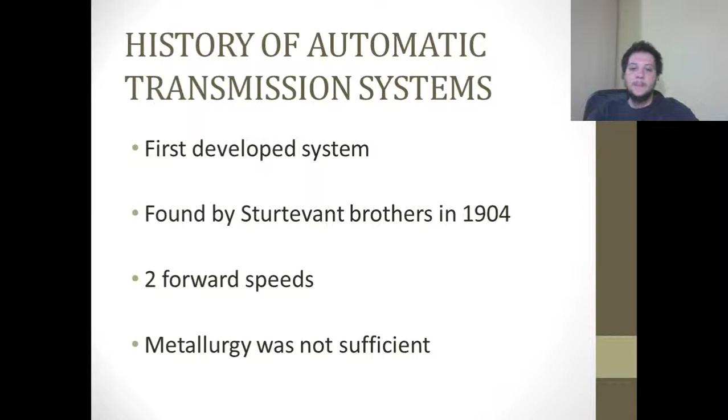The main idea behind automatic transmission systems is to make driving cars easier by removing the clutch. Now I'll show a video about this.

Did you ever realize how many motions it takes to drive a car with a conventional transmission? Watch closely. She's ready to start on her drive. With one hand, she steers. The other manipulates the gear shifter. One foot operates the clutch, the other feeds the gas, and there you are. After 19 distinct manual operations, she's finally underway. Not so with Oldsmobile's Hydra-Matic Drive. There's no clutch pedal to push, and the usual gear shifter is replaced by this simple direction selector. Just set the selector at drive, then step on the accelerator, and you're off. All shifting is automatic. Oldsmobile's Hydra-Matic is simplicity itself.

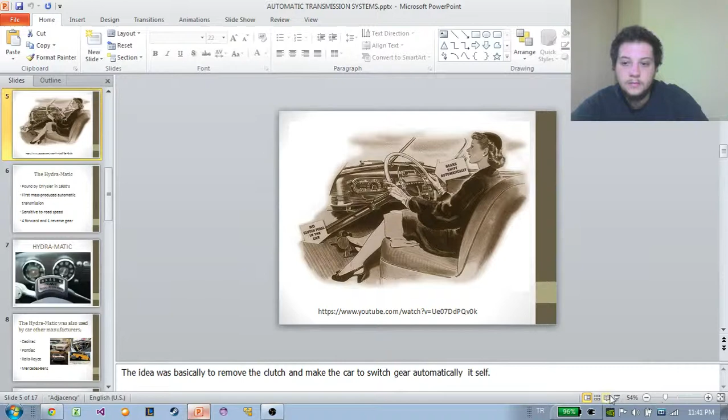This video you just saw was actually the commercial of the Hydra-Matic system, which was the first mass-produced automatic transmission system. It was founded by Chrysler in the 1930s, and it was sensitive to road speed. It had 4 forward shifts and 1 reverse shift.

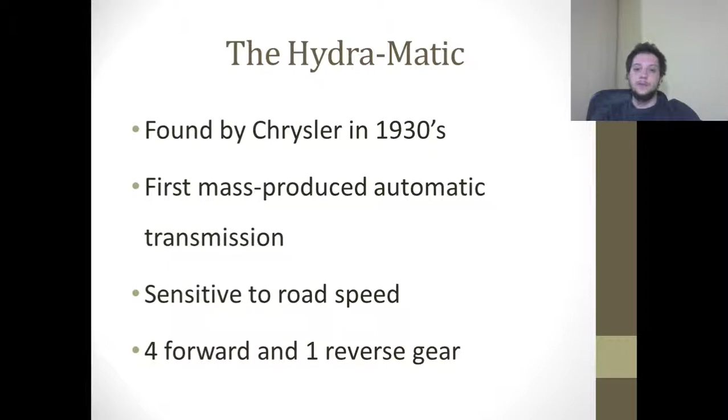The Hydra-Matic was also used by car manufacturers like Cadillac, Pontiac, Rolls-Royce, and Mercedes-Benz. It was also used in World War II in some military vehicles. All other systems were developed based on Hydra-Matic through the years. Hydra-Matic was a fluid coupling system, and the shift quality was always a problem.

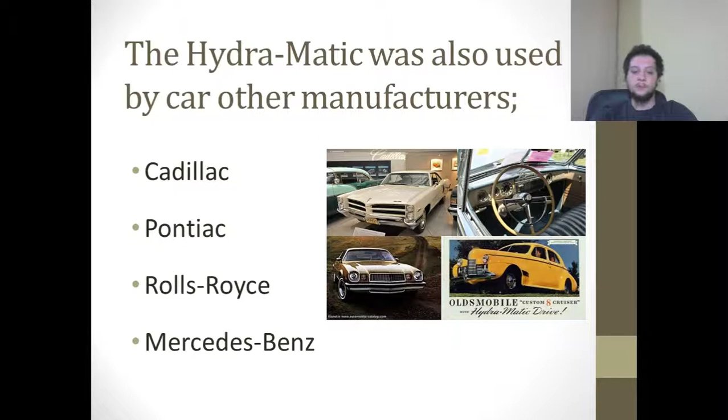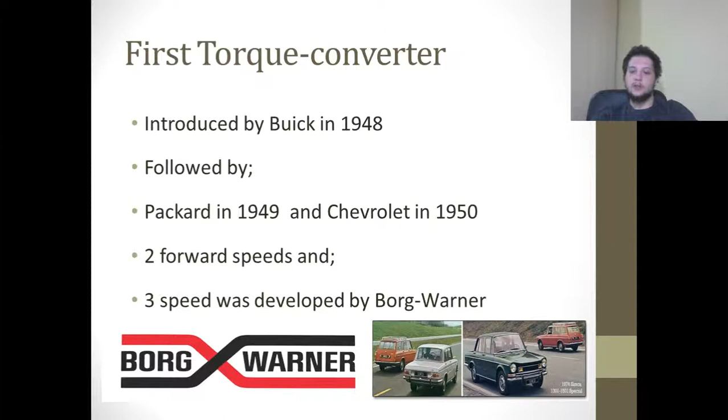Then, after Hydra-Matic systems, the first torque converter system was introduced. It was introduced by Buick in 1948. It was followed by Packard in 1949 and Chevrolet in 1950. At first it had 2 forward speeds, and then a 3-speed was developed by Borg-Warner, and Borg-Warner sold it to American Motors and Ford Motor Company.

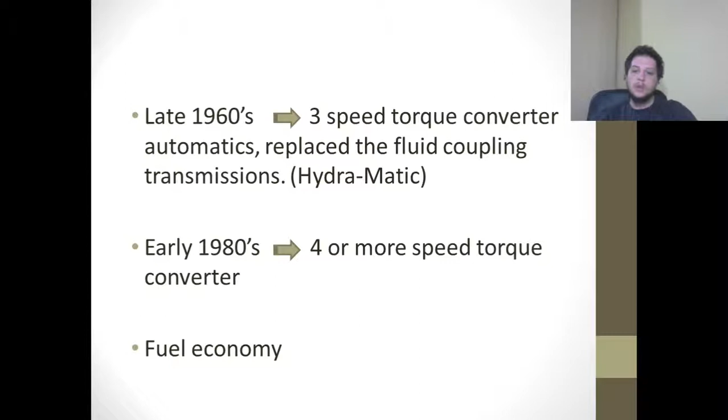By the late 60s, 3-speed torque converter automatics had replaced the fluid coupling transmissions. By the early 80s, 4 or more speed torque converter automatics were introduced, and these improved automatics were providing fuel economy.

The TCU shared the information with the ECU, and they made arrangements of the shifts, when to change and how to change. Engineers believe that this way there is more control on shift point, shift quality, and shift speed.

And with these systems, they developed the DSG system, direct shift gearbox. It was the world's first dual clutch transmission system, and it was designed by Borg-Warner and licensed to Volkswagen. Now I'll show you a video about the direct shift gearbox.

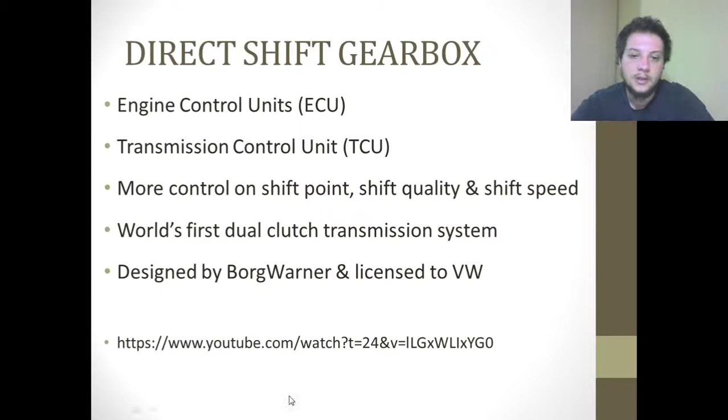DSG, the sporty and efficient automatic transmission. The DSG combines the agility of a manual gearbox with the convenience of an automatic. Shift times in the order of milliseconds mean maximum driving pleasure.

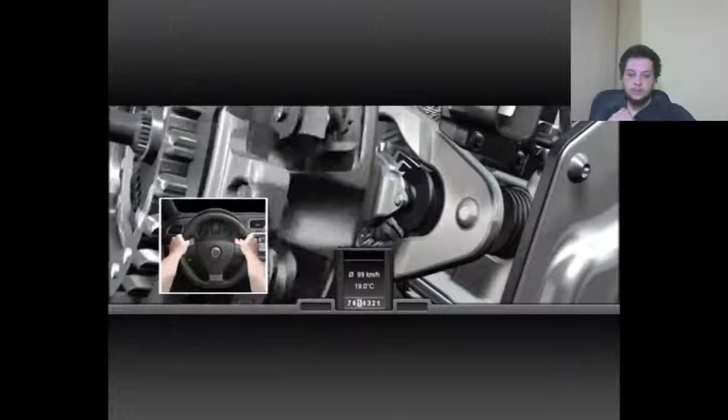The DSG gearbox accelerates without interrupting the flow of power. That means maximum comfort and outstanding acceleration. In automatic mode, the DSG always selects the right gear, and that ensures optimum fuel consumption. DSG, the most efficient automatic.

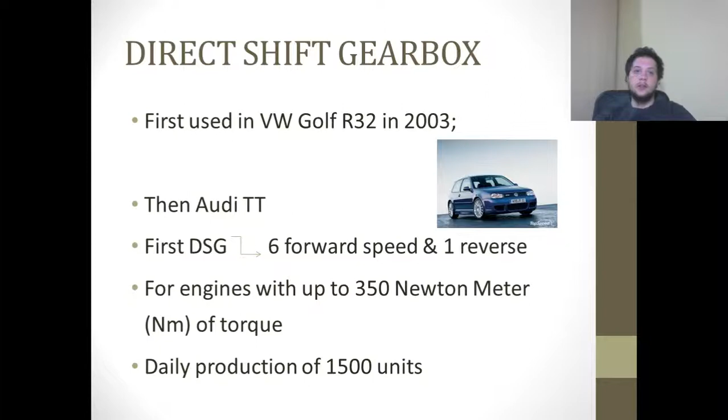Here is a video about DSG. DSG was first used in the Volkswagen Golf R32 in 2003. It had 6 forward speeds and 1 reverse speed. And it was for engines up to 350 Newton meters of torque. Otherwise, it would fail. And it had a daily production of 1,500 units. Here you see the DSG controllers.

You see the P sign. It means park. It must be used when the car is stable, not when it is moving. It engages the parking lock. It doesn't move if you take your foot off the brake pedal. The second one is reverse. Reverse mode is shown by the letter R. In this mode, it's basically used for going backwards.

The third one is the neutral mode. In this mode, everything is disengaged, and you should hit the brakes to stop the car and to prevent the car from moving. The fourth one is drive mode. When you release the brakes in drive mode, the car starts moving. It changes gears at suitable RPMs. When the RPM increases, it shifts up. When RPM decreases, it shifts down. D mode provides the most fuel economy.

The fifth mode is the sport mode. In sport mode, the ECU, the engine control unit, responds faster when you hit the gas pedal, and gears change at higher RPM levels. And the last one is the manual mode. As you see, next to the D mode there are plus and minus positions. You push the stick up to upshift and push the stick down to downshift.

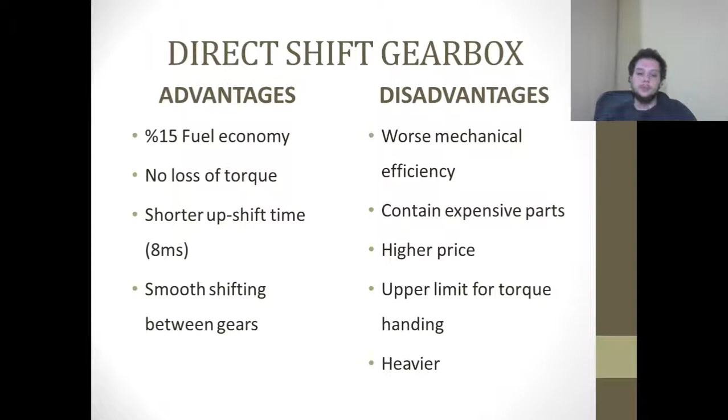So, finally, next time you're in heavy traffic, do not just wonder about clutchless systems. Since you know all the features of automatic transmissions now, consider being in one of them. Finally, if you are still driving a car with a manual or traditional automatic transmission system, I encourage you to try one with a DSG system.